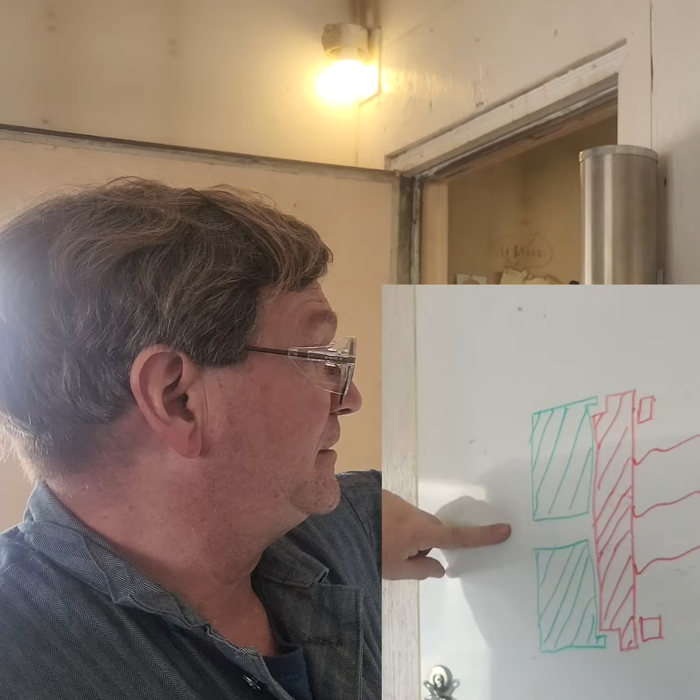Okay, I was called in for a job a while back, and this was mounted on a big drive shaft. This was, I don't know, somewhere around a 1,000 horse motor. This was about a 3 foot coupling, and it was off center. The coupling was down low here, and if it rotated that way, I mean, it was out of balance. They'd been running it for 8 years, I think, that way, and been complaining about vibration.

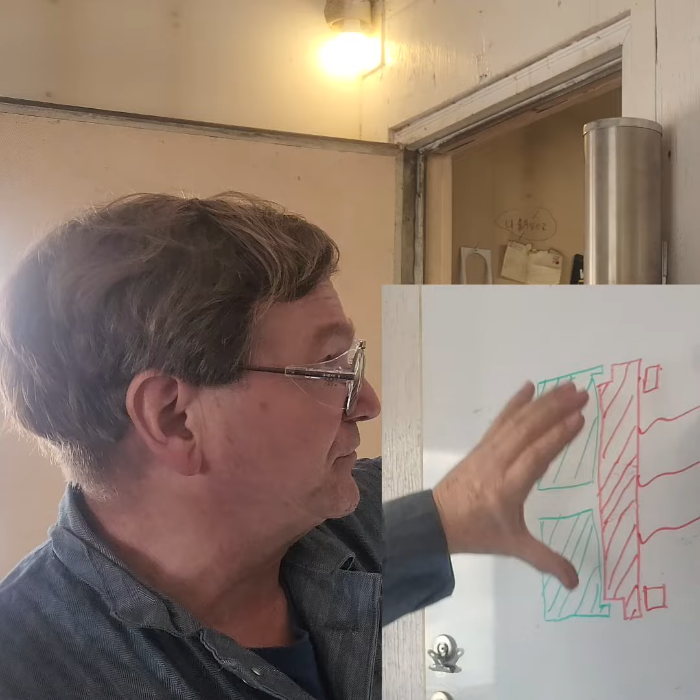They did not call me in at first. They called in a vibration analysis specialist. And he found out that this was running out, and that's when they called me. They called me to come in and asked me if I could build up a lip here, make a ring, do something so that these two centered. There were somewhere around 36 bolts that held the two together.

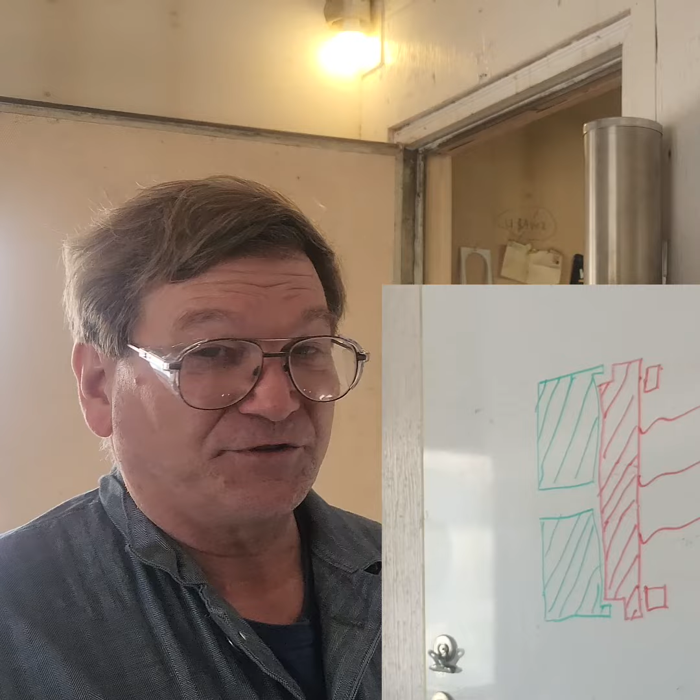So what I did, as I do many times, is I talked myself out of the job. And I suggested that they loosen those bolts, put a dial indicator on here, tap this until the two run correctly, tighten the bolts back down. Because there were plenty enough bolts with the friction on it so that it would hold it. A lot of times things don't need to be made to bolt together and be done.

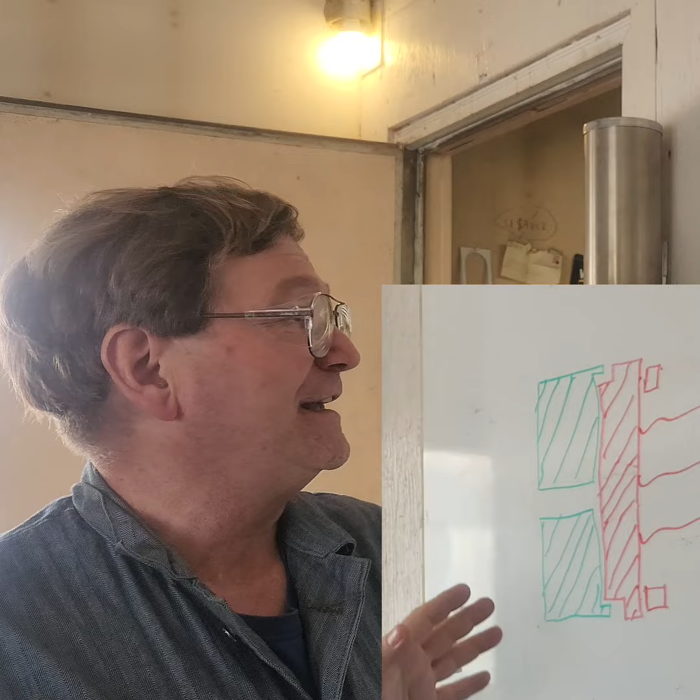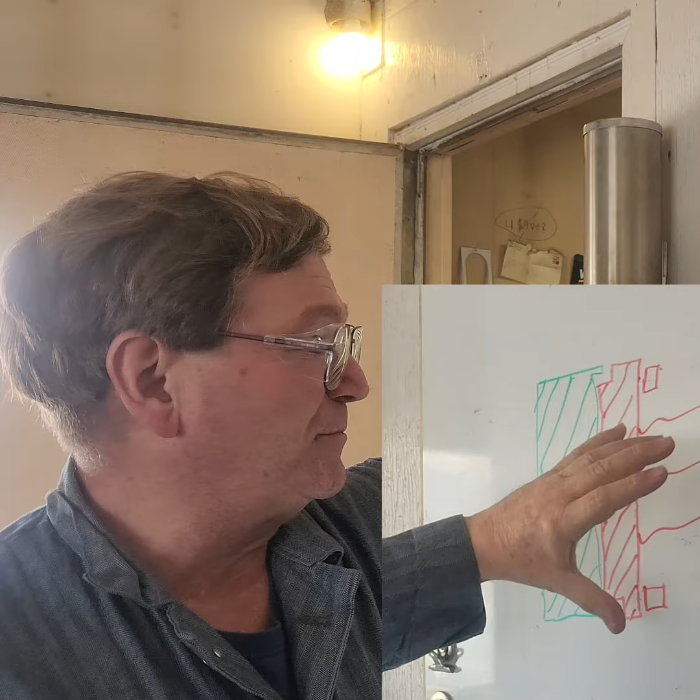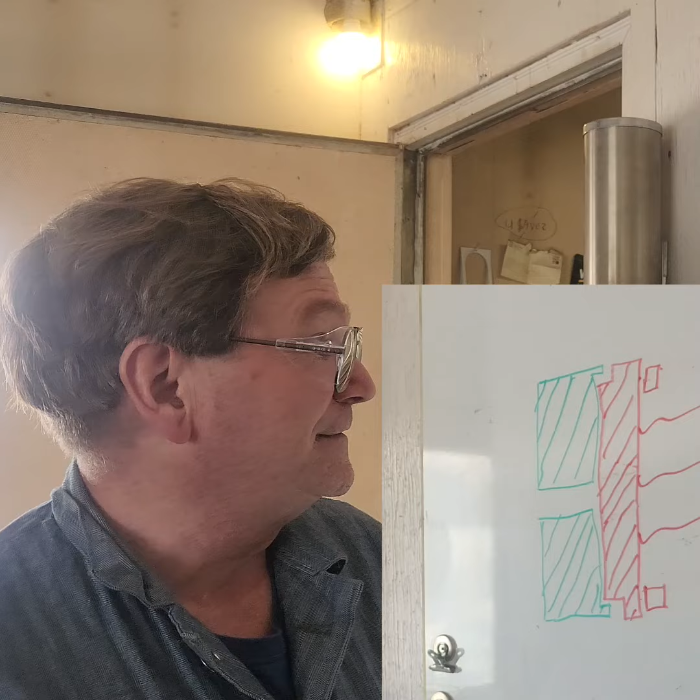And so I, as I do many times, give the customer free advice. And in fact, the guy there from the vibration analysis place, I told him, I said, you could do this yourself, and so he did that, charged him some more money. I went home, didn't even charge him for showing up, but I saved the day. That's worth something, right? Even if I don't get paid.